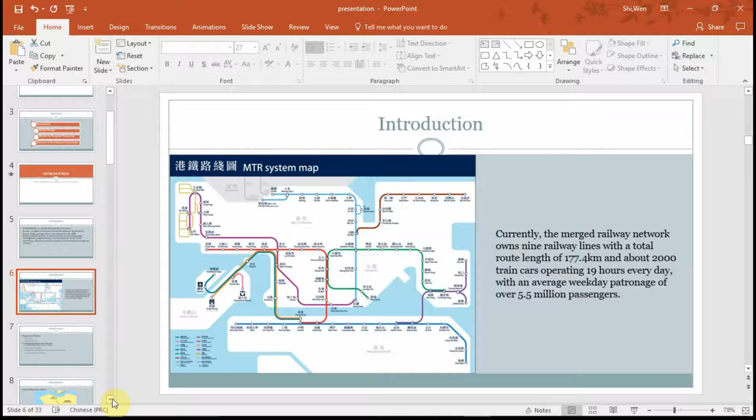Currently, MTR owns 9 railway lines with a total route length of 177 kilometers and about 2,000 train cars operating 19 hours every day. The merge in 2007 brought new growth opportunities to the MTR Corporation's business in and outside of Hong Kong. In addition to the 9 railway lines, MTR operates a light rail network and the Airport Express.

To meet the fast-growing population needs, there are 4 ongoing expansion projects. My project will focus on the construction of the South Island Line East. And this is the route map for SILE.

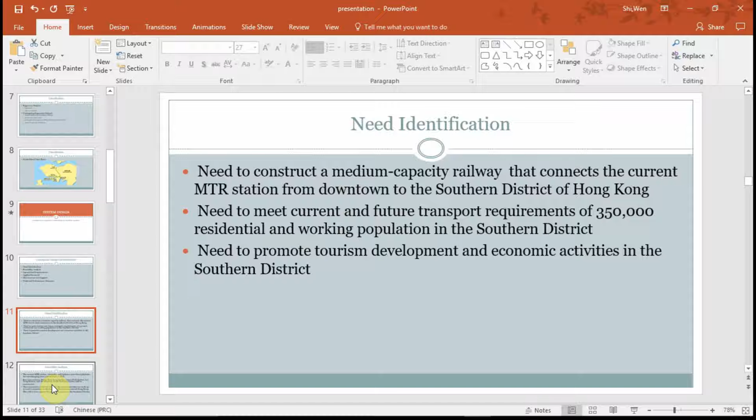Now I will discuss the system design, including conceptual design and preliminary system design. For the conceptual design, we have the following considerations. The first consideration is need identification. We need to construct a medium capacity railway that connects the current MTR station from downtown to the southern district of Hong Kong. We need to meet current and future transportation requirements of 350,000 residents and the working population in the southern district. And we also need to promote tourism development and economic activities in the southern district.

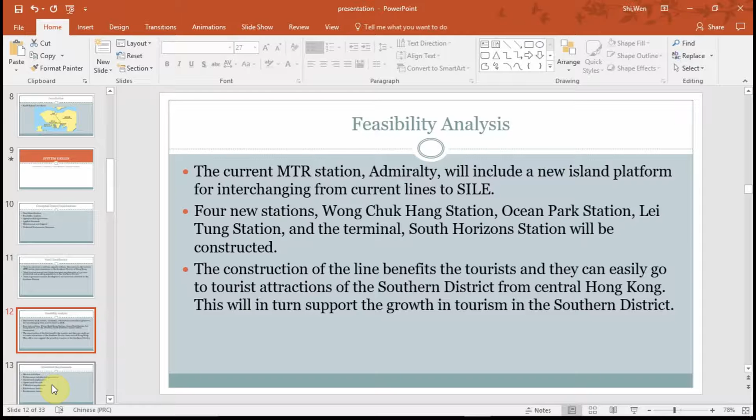The next consideration is feasibility analysis. The current MTR station, Admiralty, will include a new island platform for interchanging from current lines to SILE. And 4 new stations will be constructed, and generally speaking, the construction of the line will be beneficial to the growth in tourism in the southern district. And we have the following operation requirements, and we will go through them one by one.

The mission of the project is to fulfill public transportation needs from central Hong Kong to the southern district, reduce travel time from the southern district to the CBD, and promote tourism development. We have two important performance and physical parameters: peak hours train frequency and journey time between stations. The minimum peak hours train frequency should be 3 minutes, and the journey time between stations should not be too long.

Operational deployment requires that the new stations be located near tourism attractions to shorten the tourists' total journey time. To satisfy the future growth in tourism after the line is opened, new hotels will be built and Ocean Park will be redeveloped. The South Island Line East must be designed to have a life cycle of at least 20 years. SILE is a medium capacity system and will use 3-car trains.

The line requires shorter platforms and smaller stations, while maintaining peak hour train frequency similar to the other MTR lines and daily operation time of 19 hours. The train requires regular maintenance. The train depot is located near Wong Chuk Hang Station. Both the underground section and the viaduct section need to be maintained regularly. And for not interrupting operation, maintenance can be scheduled during closed time.

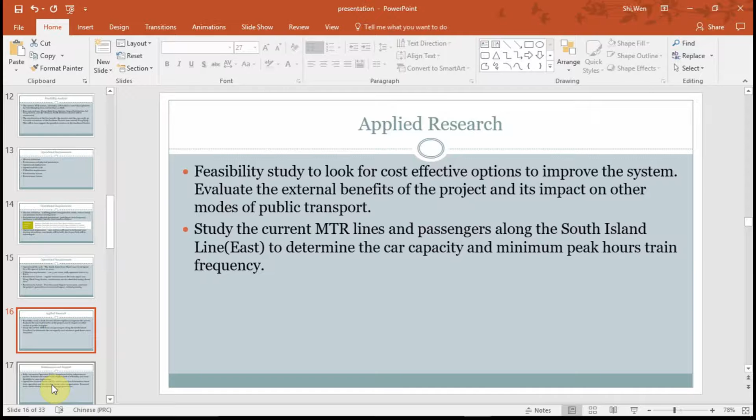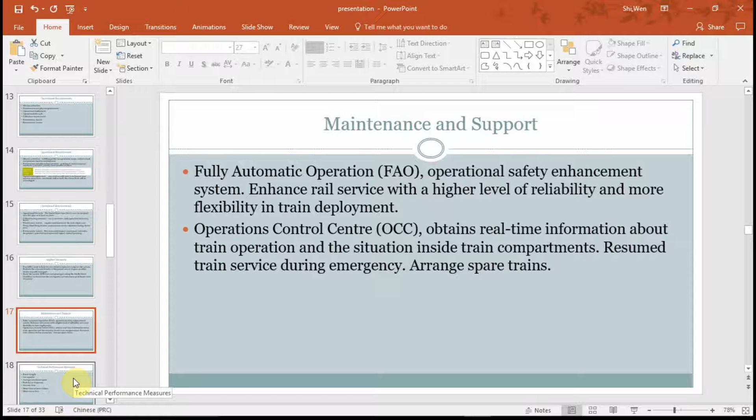The fully automatic operation system is used in maintenance and support in that it enhances railway service with a higher level of reliability and more flexibility in train deployment. And trains will be operated under the Operations Control Center, OCC. OCC obtains real-time information about train operation and the situation inside train compartments. During most emergencies, train services could be resumed by control from OCC. Besides, OCC can arrange spare trains to serve passengers to cater for any upsurge in patronage.

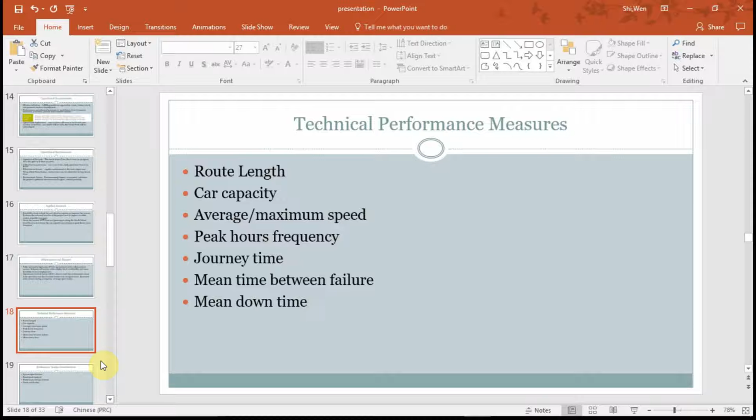And the typical TPMs for the system include route length, car capacity, average or maximum speed, peak hours frequency, journey time, mean time between failures and mean downtime. And next, we proceed to preliminary system design. We will go through all these considerations one by one.

Type A system specification will specify the design of the five stations. Type B development specifications will specify station facilities and FAO and OCC applied in the system. Type C product specification will specify train features. Type D process specification will specify peak hours, train frequency, and other TPMs that should be tested and evaluated. Type E materials specification will specify inner facilities of the train and building materials.

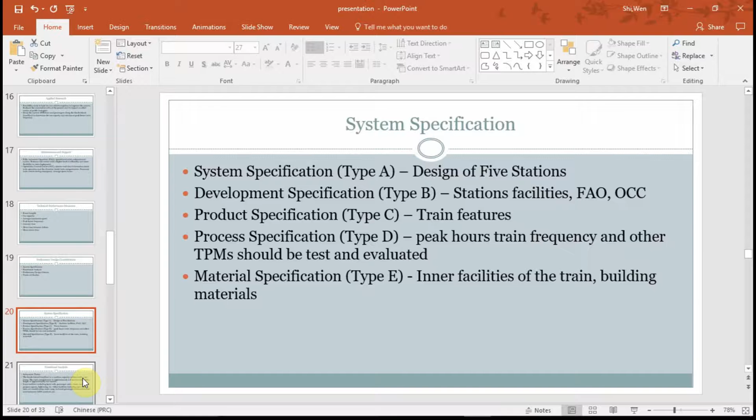And functional analysis will analyze at the subsystem level. One major subsystem is trains. We already know that the SILE is a medium capacity railway with 3-car trains. The train compartment is approximately 2.8 meters wide with a height of approximately 2 meters. It will also include the following inner facilities.

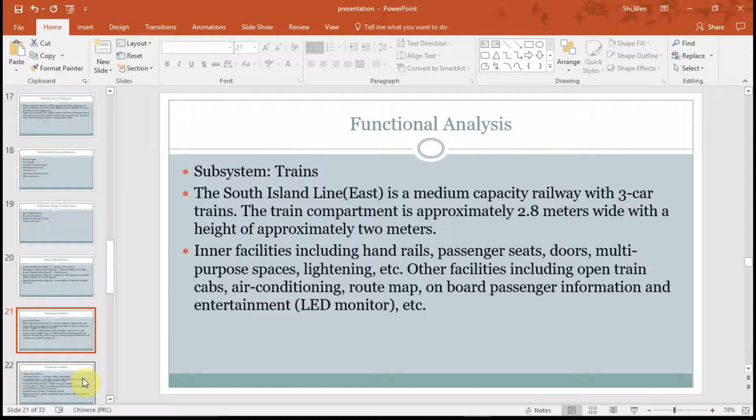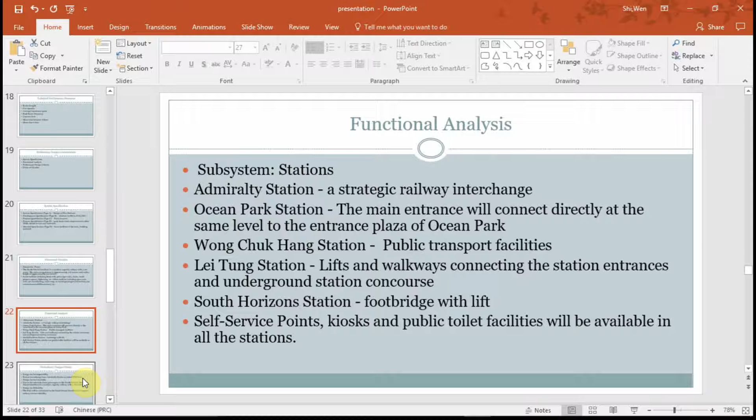Another major subsystem is the stations. The existing station Admiralty will be expanded into a strategic railway interchange for 4 MTR lines. The 4 new stations each will have facilities that provide a convenient and efficient railway service to residents in the surrounding neighborhood areas. And self-service points, kiosks, and public toilet facilities will be available in all the stations.

And we have several points for preliminary design criteria. First, we have to design for interoperability. We need to ensure interchange from Admiralty Station to other MTR lines. Secondly, for sustainability, the South Island Line East should be a medium capacity railway with 3-car trains because of the relatively fewer passengers in the Southern District. And the FAO will be introduced in the South Island Line East to improve railway service reliability.

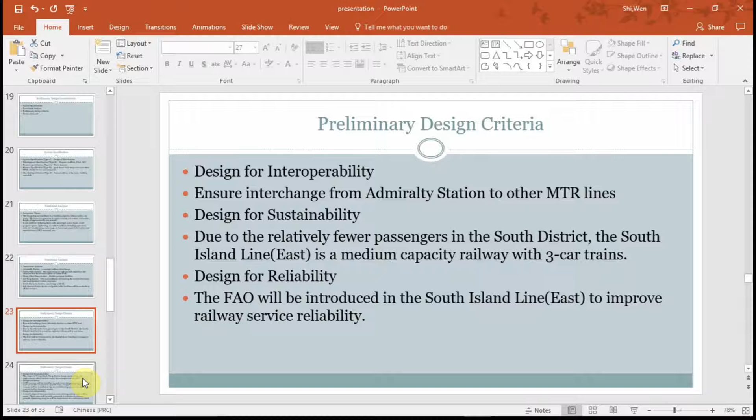For maintainability, we have a train depot in Wong Chuk Hang Station to keep spare trains for replacement under the arrangement of OCC. For safety, we have CCTV cameras installed in each train compartment for control staff to monitor the train. And finally, for affordability, a total budget of the construction cost and operation costs will be made. These costs will be well contained in relation to revenue growth. Operation margins will be maintained at a satisfactory level.

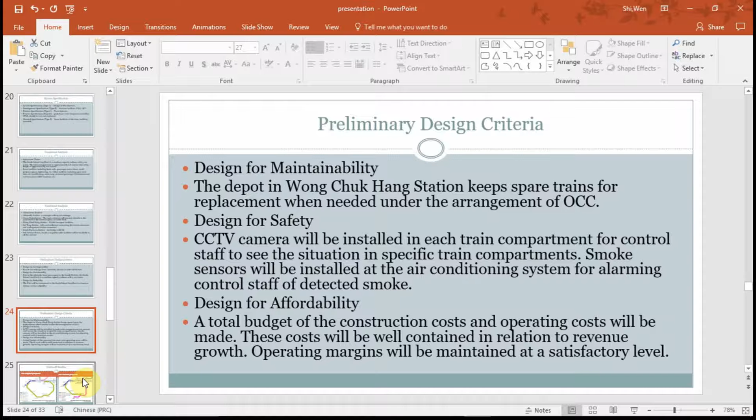Trade-off studies are used in the route determination. The original proposal of the South Island Line East was a semicircular line with 9 stations intended to serve the southern end of Hong Kong Island towards Aberdeen. However, the original proposal has some major drawbacks, so it was modified for a more cost-effective line, tackling all the drawbacks. The current proposal transfers the western section to the South Island Line West. The South Island Line will be a medium capacity system, and the Wan Chai station and Happy Valley station are eliminated.

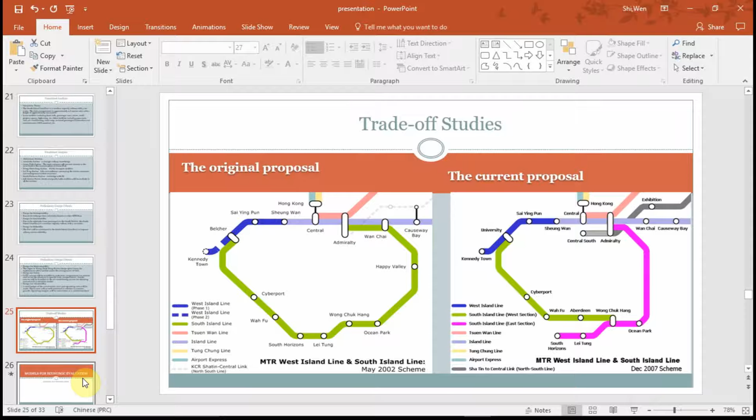And next we will discuss models for economic evaluation. A railway is considered not financially viable if the present value of all its projected revenues falls short of projected expenditures. This shortfall is known as the funding gap, and we will now examine two simplified models of the system and find out the preferred model.

The first model is the original model. The initial capital cost is 11 billion and the annual estimated economic internal rate of return is 5.2%. Under a 5-year schedule, the funding gap is computed by discounting all the yearly revenue to year 0 and computing the net cash flow. After calculation, the funding gap for the original model is 9.2 billion.

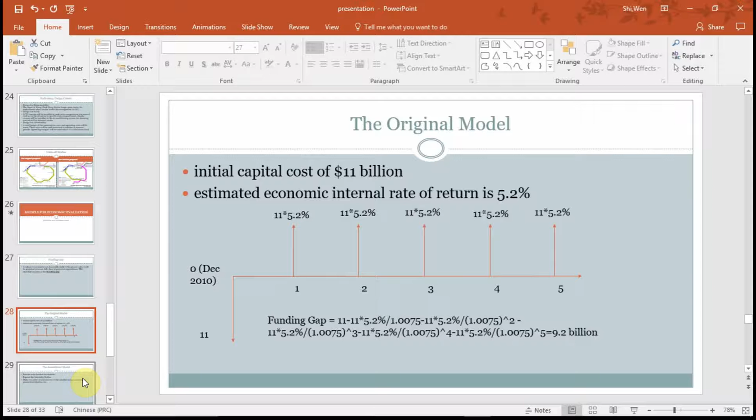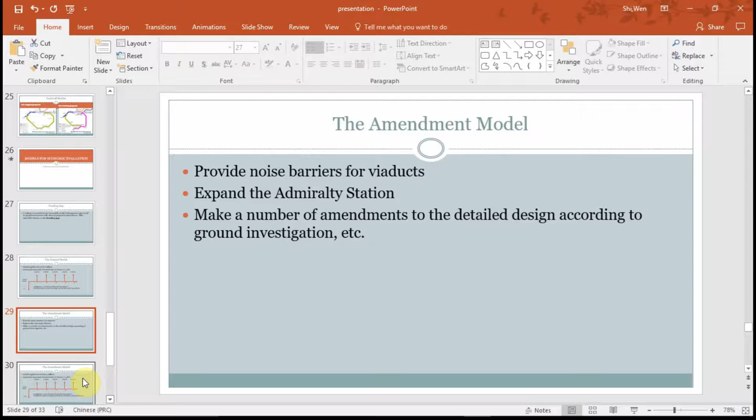The amendment model includes amendments in the design stages, including providing noise barriers for viaducts, expanding the Admiralty station to be an integrated station, and making a number of amendments to the detailed design according to ground investigation. As a result, the initial capital cost is increased by 1.4 billion and the estimated economic internal rate of return is now 5.8%. By applying the same method as the original model, the funding gap of the amendment model is 8.8 billion. Since the amendment model has a lower funding gap, we can conclude that the amendment model will incur a lower funding gap as well as provide better service for the passengers.

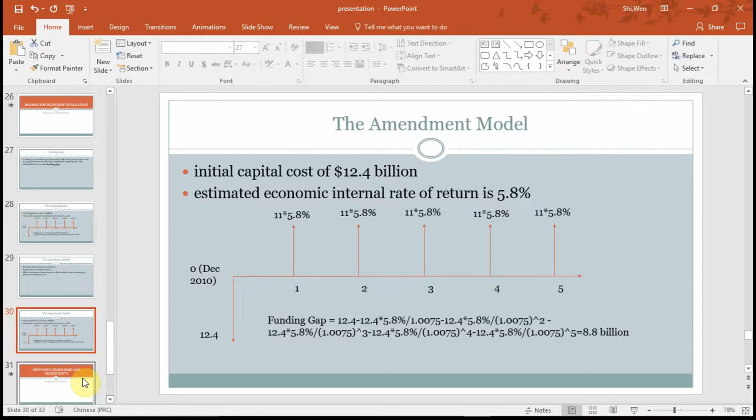Finally, we will discuss the decisions on risks and uncertainty. When a new project is initiated, any new issues should be evaluated to identify significant risks to the well-being of the existing business. Currently, the significant risks managed by the company for the new line include corporate reputation and trust, and an enhanced communication plan has been implemented to provide more timely and transparent information to stakeholders on key issues. Major railway service incidents.

For individual incidents, investigations or technical studies were conducted to identify opportunities for continuous improvement. System crowdedness. Crowded trains and longer on-platform waiting times are being managed to enhance customer satisfaction. Workforce transition and increased manpower needs. To manage the workforce transition and tackle manpower shortage, various measures will be considered, including proactive manpower sourcing, advanced succession planning, skill enhancement, and deferred retirement.

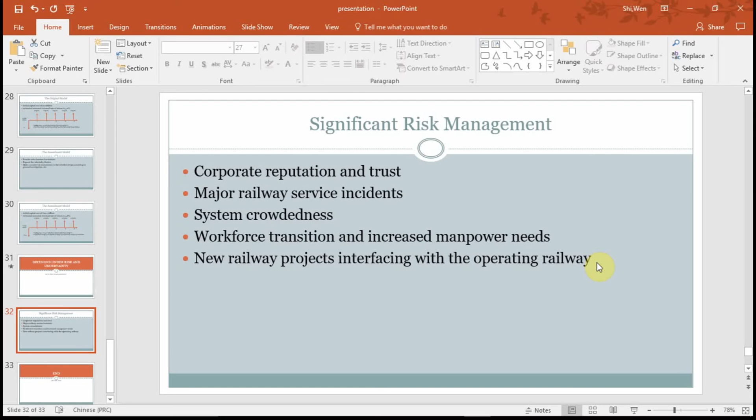New railway projects interfacing with the operating railway. This risk is being managed through strengthened collaboration between the operations and the project teams, including the implementation of risk control measures and surveillance and monitoring arrangements.